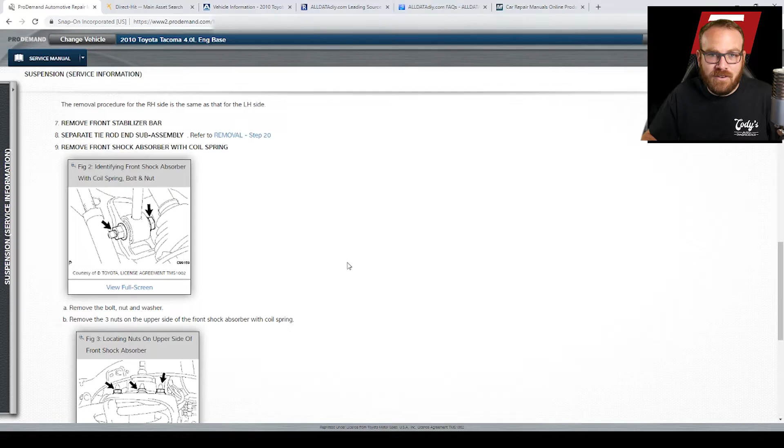So there's a lot of factory repair information in here. They don't always recreate it, so no matter which company you're using, you could be getting factory information part of the time, and rewritten and redrawn information the rest of the time.

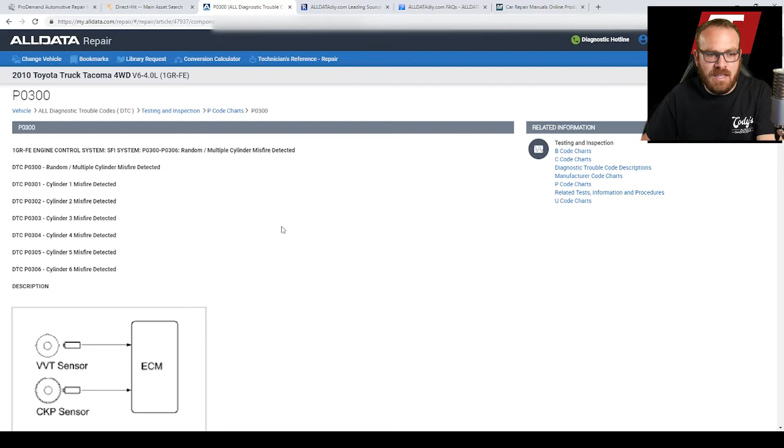Let's just jump over to Alldata and we'll do the same thing. After you punch in the vehicle, it defaults to this screen. There's a search box up here. We could type in, let's try P0300 again, see what we get. Testing and inspection — so it doesn't give us all the extra information, the recommended fixes, stuff like that. It brings us to the factory code definition and testing and procedures.

And let's look up those front shocks — steering and suspension. Now this layout is quite a bit different than the Prodemand layout. It brings you to this screen here, which has repair information, parts, service bulletins, specs. This says P&L, that's parts and labor. Sometimes they'll have both icons here, but we'll go suspension, shock. Oh, that's just the tower. Let me go back.

Parts and labor. So it's not bringing us straight to the repair procedure. If we click on it, let's click on that. So the navigation is quite a bit different. I'm still getting used to AllData, but I do like some of their features.

So remove and replace, four wheel drive. Quite a few clicks if we go in there manually. It probably would have been faster if we used the search feature for AllData. But those of you familiar with AllData probably know how to jump right in here and do it.

Now let's go over to Identifix, and we're going to punch in the same thing. It's a little faster to use the search feature on Identifix than the service manual. Right here is Identifix's main feature, which is recommended repairs, confirmed fixes, and alternative testing to the factory testing. Let's scroll down here, and it'll have how to repair, how to remove and replace. We'll click on that, factory service information.

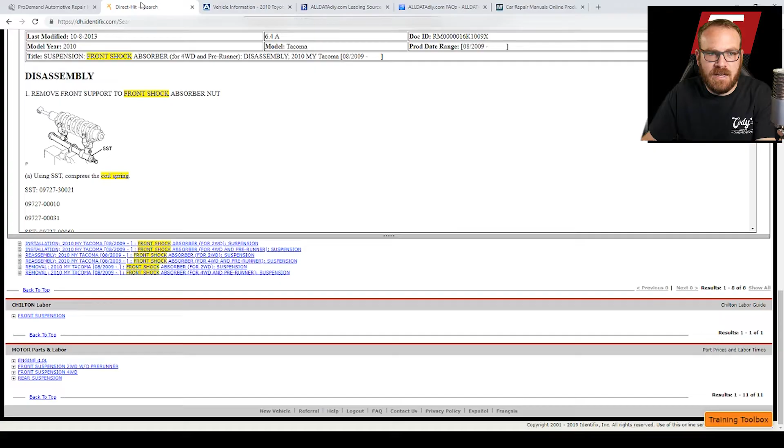Prodemand, we can try the search, see if it'll narrow it down for us. If I spell it right here. So we can go keyword search, front shocks, service information removal. So you can find it that way. I'm just used to looking through the actual service manual and picking the procedure I want. But as they're changing the manuals and getting more complicated, the search feature may be your best friend when you're looking for something specific.

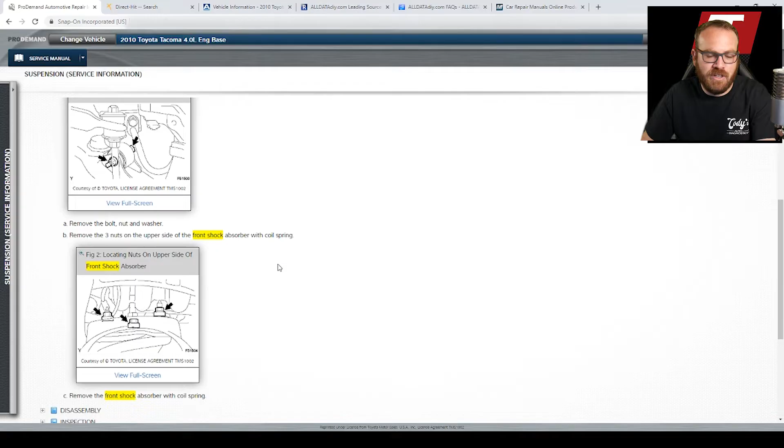Let's cover some of the maintenance and fluid menus that each company has. So from Prodemand, we can do the 1Search. Let me go back to the home here, and we can go to fluid capacities. It'll show us everything real quick.

Which part of the vehicle are we servicing? What kind of fluid it takes is over here. How much, metric and standard. There's some notes in here, and some different engine options depending if it's manual transmission, automatic, four-wheel drive, two-wheel drive. So it's kind of all on one screen, easy to read, but occasionally there will be missing items, and you actually have to go into the repair manual for that specific part. It'll tell you how to test it and what type of fluid to add.

I typically go down here to the maintenance tab, and then you can pick what your mileage is. I haven't found a good way to print off service intervals from Mitchell. If I go to print here, it's going to try and print a whole bunch of information, so 90,000 miles, and then down here below it has all the other stuff that's further down on the screen. If I just want one item, you're not going to want to print it from Mitchell unless you pick which page in that list and print just that one page.

So let's jump over to Identifix. Now this is probably my personal favorite when it comes to recommended maintenance. So we'll punch in 90,000 miles here on the home screen, and I really like the technician plan. You can print off the customer plan if you want to give them a hard copy of it, but the technician plan, you're not going to want to print this because there's a lot of information. It doesn't have just the 90,000 mile service, but it has the repair procedure for each one of those line items, including torque specs, fluids, lift points.

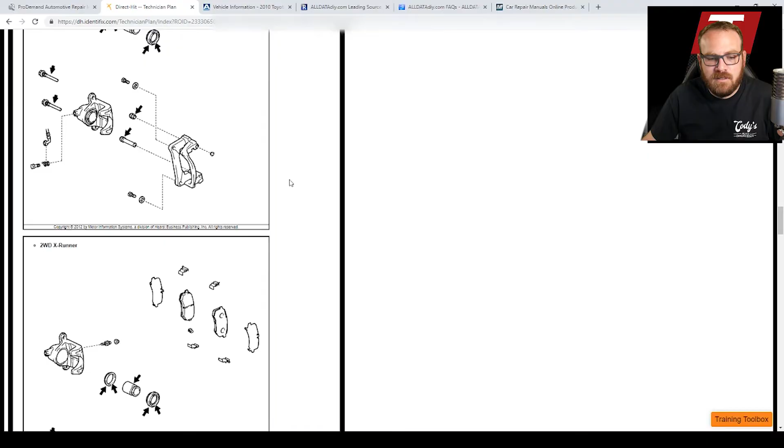You can look up recalls, reliability reports, service bulletins. It says there are 130 listed for that vehicle, but right underneath, the amount of grease fittings on a 4-wheel drive, there's 4 to 5 fittings depending on the wheelbase. And then lifting points, it shows you where the stuff is under the hood, the oil cap, whatnot, procedures, belt routings, and then I think all the way down here at the bottom, I saw firing order as I was going through there. It gives you the wheel torque.

So great quick place to find all of the common repair information for your maintenance items. So for your lube tech, if they are doing rotations, fluid exchanges, stuff like that, this is a great resource. Proper lifting of vehicles — some vehicles you'd be surprised where the recommended lift points are, and you'd be surprised to find out that you haven't been lifting them by the recommended spots.

If you want that information quick and easy, you have to punch in a mileage. Even if you just want the lift points, punch in something like 10,000 miles, whatever you need to do, hit that technician plan, drop it down, and you'll get those lift points. Let's jump over here to the customer plan.

And it's a very basic report of what was done for that 90,000 mile service. So it doesn't have all the repair information that we were using earlier.

We can go to maintenance schedule, and this is going to look a lot like what the Mitchell Prodemand had available. It's going to show the mileage and check marks of what needs to be done.

Let's jump over to Alldata. Click on the maintenance tab. Now they have a little bit different setup, and they may have something better, but I just don't know how to use it because I'm kind of new to Alldata. I've only had it for a few months. But let's go to the normal service table.

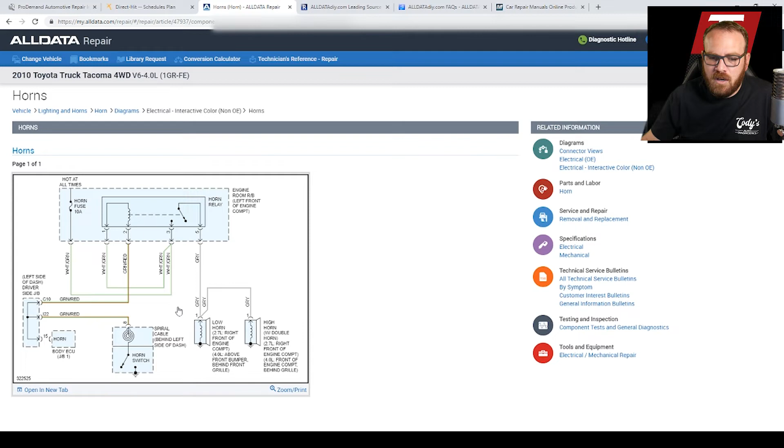And they have made some changes to the highlighting system, and I'll cover that in that other video. If we want to look at the factory information now, we can click electrical OE. It'll take us to the horn circuit.

Very basic as well. Let me turn that sideways so it shows up a little bit bigger on your screen. Very similar to what we had on the aftermarket redrawn one with a simple circuit like this. With more complicated circuits, the redrawn diagrams are sometimes way easier to read.

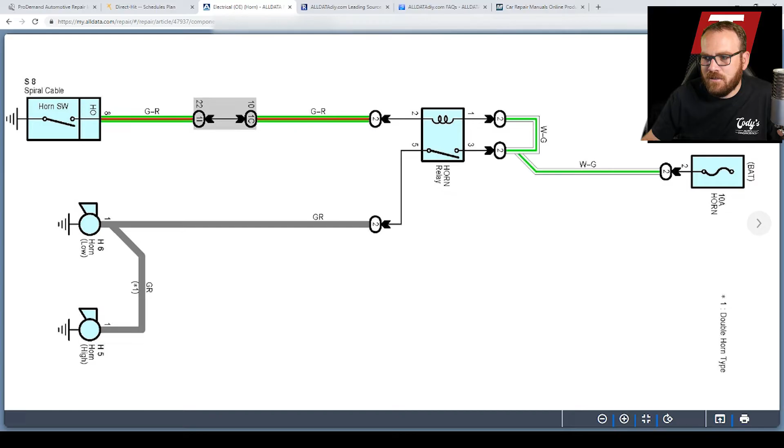Let's go to Identifix. We'll punch in horn. Now I also could go up here to service manual, go down to electrical wiring diagrams and find it that way. But if you type in what you're looking for, you can come down here.

They have the motor diagram, which is probably that same redrawn. No, it's not, it's a different diagram. So that looks like the factory diagram, only there's no color. And then color diagrams - this is the same diagram that we had access to from Alldata, the redrawn diagram.

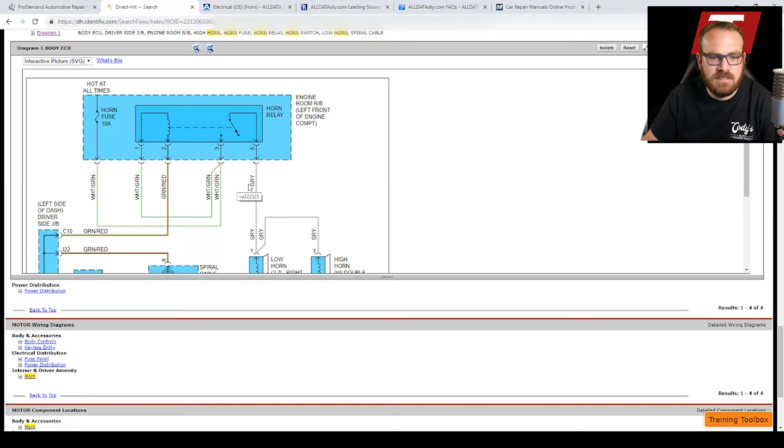We can highlight stuff. And then up here we have the factory wiring diagrams, and it's all in color. So Identifix had 3 different diagrams: one was just a black and white version that wasn't even redrawn, one was the interactive color diagram, and then we have the factory diagram in color.

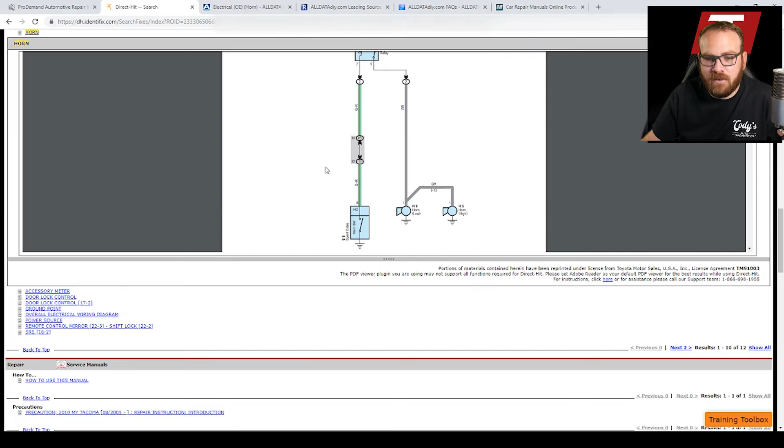So in Prodemand, we go to Horn, click on that, same redrawn diagram. We have our different colors. It's highlightable, very similar. I don't believe that you have access to the factory wiring diagrams in the Prodemand system.

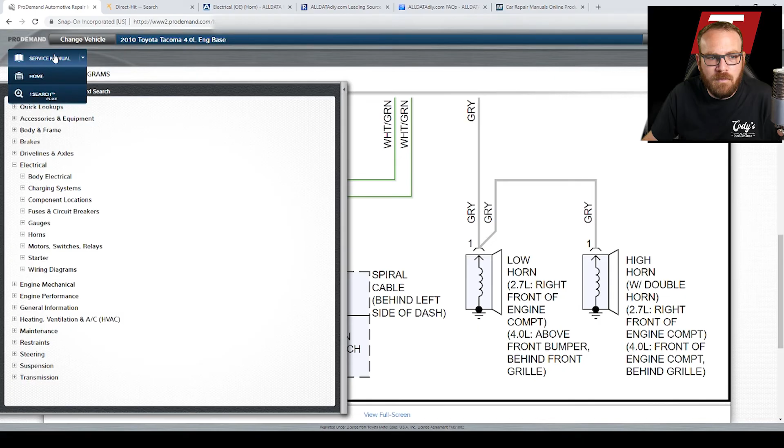So that's a quick overview of the wiring diagrams. Like I said, I'll have a video of the major differences between the companies and some of the new features that they've included. So this is all based off of the full-blown shop subscription to the repair information.

Now, if you're a DIY person, you're not going to want to spend $200 to access it for a month to fix your vehicle. So there are some options. Alldata and Prodemand both have a DIY subscription.

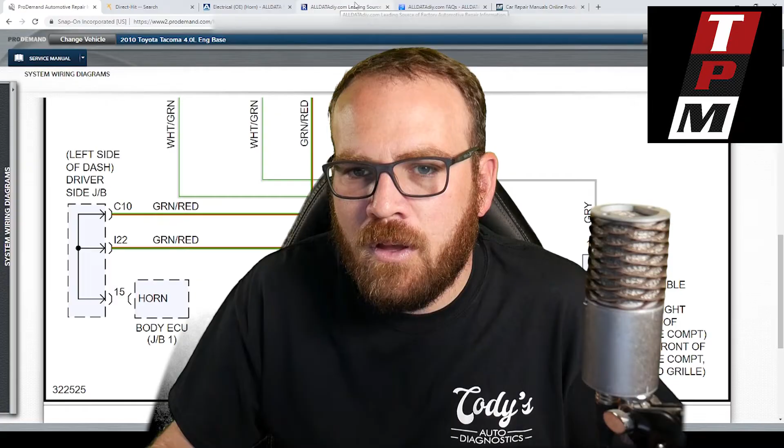Let's talk about the differences between them and which one I would recommend at this point.

The Alldata DIY has pricing on this screen. Your first vehicle is $29.95, and each additional vehicle is $19.95. That's for a full year subscription. So you pick your car and get a full year access to all the repair information and wiring diagrams. Another vehicle you're working on or drive is another $20. That's a pretty good deal if it's your own vehicles.

If you're doing side jobs maybe once a month, it would make sense to purchase the DIY, because your primary vehicle you drive every day is $30 for the year. Every vehicle you work on in your driveway, even as a weekend project, you pay the $20. You get all that repair information, so you don't have to start guessing or scrounge the internet. It's all in one place. If you keep your vehicles for a long time, you'll save quite a bit of money with a 5-year subscription.

That's around $50, so that's $10 a year for repair information. Additional vehicles are $35. I didn't find on their website, and I did send them an email, but I didn't see any limitations of what data was included.